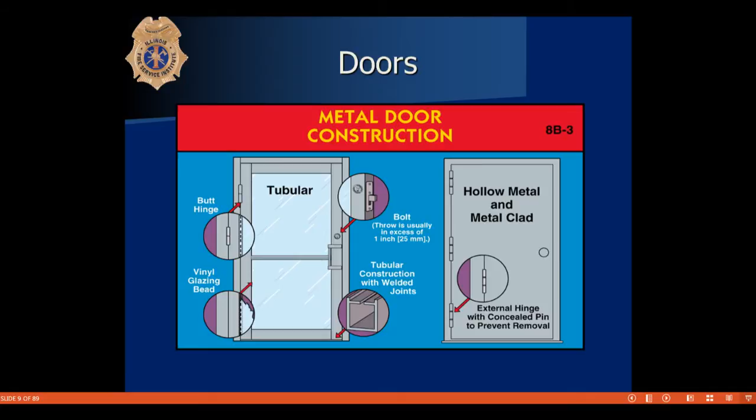Metal doors can also be hollow as well, but they'll have a ribbing system in it. Usually it won't affect you too much. As you pry on this door, you'll probably feel some flexion. As you try to work there, it won't be as stiff as some other ones.

Talking about jamb types - there's two jamb types you're going to see: rabbeted and stopped. Rabbeted is what you see right here - they've got metal frames with a metal stop, it doesn't come off. The stopped ones you see up here are like at home, where you nail a piece of trim on - you pop the trim off. Just know the difference. Why?

I pop the trim off, I put my shove knife or a little screwdriver, I'm in like nothing, no big deal. Other differences too - with a rabbeted jamb, it's one piece construction. There's just showing examples of it, and per examples, the doors right here - those are rabbeted jambs. Door swings, we already talked about.

We can tell by looking at these ones in and ones out. Would you agree with that? Does one door look harder or easier to get in just from looking at it? They're both in a masonry type structure, some type of ordinary building.

But this one's got glass. If I can't easily separate it, can I break the glass and reach in? That's not an option here. Other thing, two options we talked about - what do you see? Talking about lock assemblies.

I'm going to fly through this, guys. If I'm going too fast, stop me. I know you guys want to sit here for hours. Different type of locks, okay?

Real common you see at home, key and knob. Rim lock - you see many of these around your area anymore, these two? Those are the older homes, right? I know by us, the old ordinary homes or the brownstones on the boulevard, we see a lot of these. Old wooden homes with custom doorways.

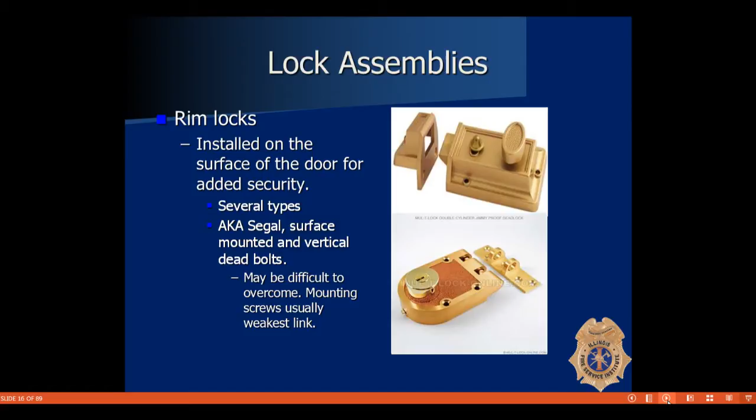Deadbolts. Newer deadbolts have changed as far as throw and construction feature and how well they work. Here's more of your common grade. That throw can be anywhere from 1 inch to 1.25 inches, so a little bit more of a throw into the jamb itself. So I'm trying to get those doors open for me - I already kind of know how far I got to separate.

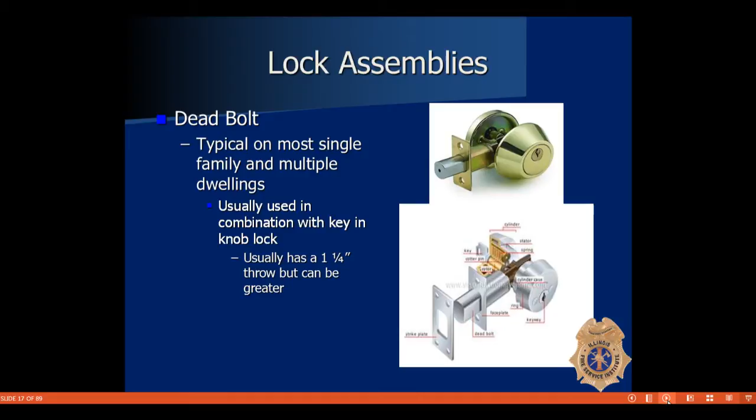If you know how your Halligan's made, you know how far your fork or adze got to be in, and as soon as you pry up or down, prying it out, you already know you've defeated it. Combination of the two together.

Here's showing the older doors with the deadbolt built in. Here's an old door - look how far that throw comes out. It's like next to nothing, okay? And look how much edge there is here of the door material. Odds are you may even get the door to split and you're in. Not a big deal if you have some of these in your areas.

You guys got anything? Jump in. I'm going like Jimmy John, speed pretty fast - so usually those mortise locks, yes sir, they're in the old panel doors.

So in other words, your outside is a 2x6, it's mortised in. Your inside's a quarter inch veneer panel. Knock out the center panel, walk right in. Walk right in. You don't want to mess those things up though.

But if it's a fire - so it's already messed up, right? Yeah, I mean, well yeah. Right, I mean it's easy to fix, to put that center panel back in. You take some, pull the trim outside off, put the door panel in. Yeah, it's easy.

This is showing a commercial lock where they have the guard so that you can't pick it. No big deal, still a larger throw with your deadbolt - that's about an inch throw.

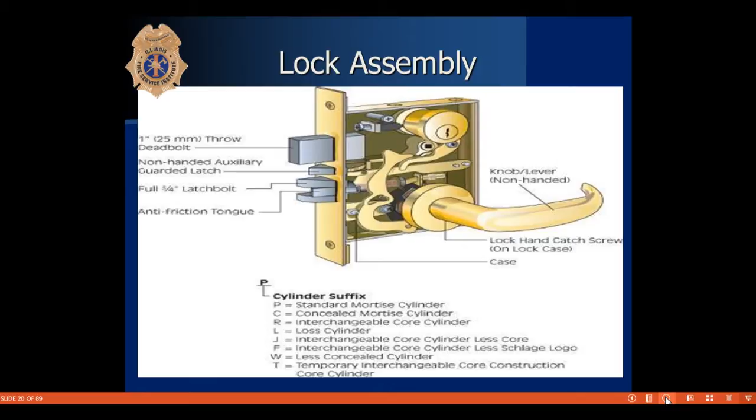Other options, panic hardware, different locks, slide bolt that goes up and down here. These are your harder doors, the ones we're really talking about for forcible entry. Most people don't have problems with residential doors.

Do you guys have any of the security storm doors here? Yeah, those are almost more of a pain to get into on some residential doors, depending on the throw and how they're done and what deadbolts there are.

With these things, what I don't like is the backside, the outside where I'm standing. Because what do I usually see? A lip, maybe a center lip, a carriage bolt, or nothing. It's the doors where I see nothing that are your problems, because I don't know what's there. They could back a forklift up against the door, a couple pallet jacks or something, who knows what. Those are the doors that could be your problems.

When I see a door like this, when I see carriage bolts or I see something, those are indicators of where I probably want to start my operation.

Padlocks, there's so many different types. How much time are you going to spend on it? There's different ways to get in. You can use the forks, spin the lock. But if there's no room to get the Halligan on, how can I spin it?

Okay, you can use the pick end, get a sledgehammer, hit the pick. Bolt cutters, saws, a lock breaker. Who knows, you may have something else on your apparatus.

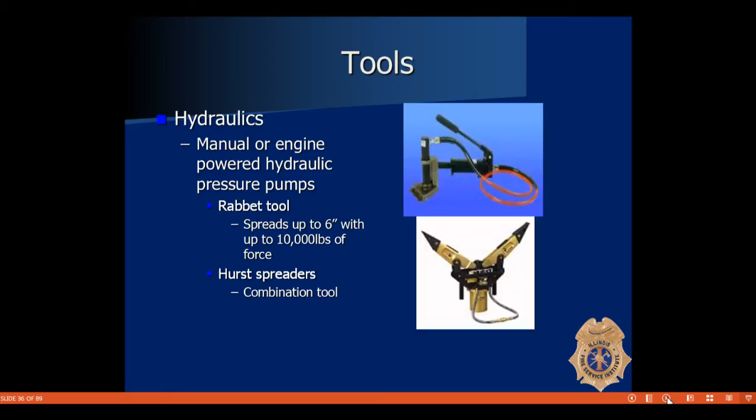K950, that's just what we have. That's a type, whether it's a Stihl, a Partner, Husqvarna, whatever.

When you're cutting metal doors, if you give it full throttle and put the saw in the door, what tends to happen? Does it walk all over? If you push it hard and fast like you think it's a wood roof, it may either bury it, bounce off, or damage something.

You can't just bury a metal blade into a metal door. Slowly feather the trigger, bring up the RPM. You might have to actually groove what you're going to cut to get that purchase point, okay? If you give it full RPM and bury it in, you could have something happen.

We had one by us where they did that, and they didn't see the fissure cracks. They buried full throttle into a hinge. The blade shattered, broke off the shroud, knocked the belt off. The guy's lucky he isn't dead. The pieces went flying fast.

I'll also say there's probably some poor maintenance on our part. We probably didn't do a thorough or good inspection of that blade itself. When we took it back and looked at the blade, you could see fissure cracks from the relief holes in the blade. Shame on us.

How about the abrasive blades? Another thing we're awesome for. We'll store these blades with the saw with the can of fuel. What do you think fuel does to these blades? Yes, it corrodes them or deteriorates them.

Damn, nice one. I gotta use that in a sentence. All right, I'm gonna use that one. All right, so something to think about.

Guess where our blades are still stored? Sorry, the chief's gonna call me for swearing. Yeah, all right, guess where our blades are still stored?

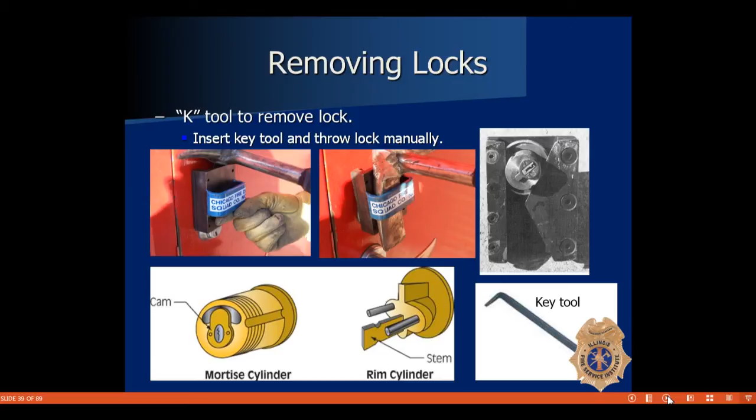Chain link fences, this sounds stupid. We have a lot of chain link fences by us, right? Backyards, people want to protect their stuff, especially in the crappier neighborhoods or lower income neighborhoods, I'll be politically correct. A lot of chain link fences.

I come up and this thing's locked and chained, I don't have much room to work. How hard is it for me to get in this gate? Pop the hinge, right? Pop the hinge up, pop the hinge down, whatever. I can even secure it. It's a home run move.

Did you see this video? I think you put it together, nicely done. That's a home run move, pop it up and down. Problem is when you get to your bigger fences and gates, you ever see them? They almost got like a U-clamp on them. That isn't going to work in those scenarios.

Other forcible entry problems, scissor gates. This is an odd one, this is actually in a roller in a track. Most normal scissor gates just go up and down.

A lot of times it's easier to break the hinge side loose. Because what usually holds this metal track into the jamb? Lag bolts, right? It's a wooden structure, it's a lag bolt. If it's an ordinary structure, there's still some type of lag or anchor in the masonry, in the mortar joint. You can take your Halligan or your sledgehammer, break the joint, and get that hinge side to come loose.

This is showing all the ways to get through locks on a scissor gate. Break it off with the pick, right? Smash through, put the forks on and spin it.

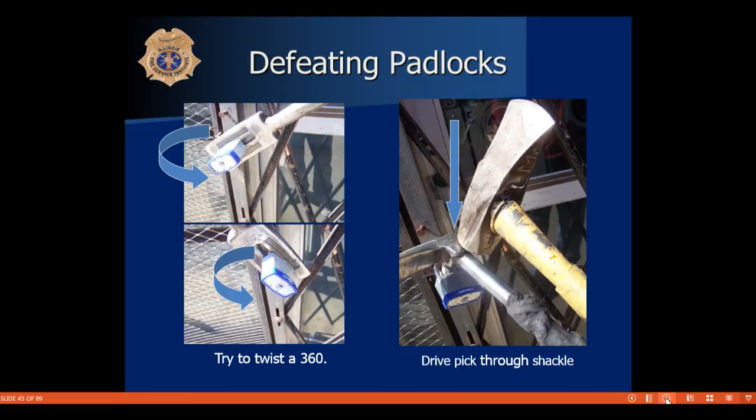On locks, they have heel and toe shackles, meaning the shackle must be cut on both sides because it won't spin out. I just cut both sides all the time, it's your home run move. Because if you only cut through real quick and go to spin it and it won't spin, it's because it has this kind of configuration. Just cut both through all the time and you're done.

That's showing the lock breaker splitting a lock. It works great if you bring it. I'm not carrying that in my tool belt with me or in my pocket, not happening.

Try to break hinges on gates, pry up - we talked about that already. And ornamental stuff, you have some of these. These are sometimes harder to get in than the door itself, because if it's in a masonry building, an ordinary constructed building, you got a deadbolt in the knob, the deadbolt's thrown in, there's not enough room for play. Okay, the other thing is, once you get it open, what do you do?

Do you take it off, completely remove it, or do you fight with it? A lot of guys try to put a wedge there, or a piece of chock, or block it open. Tends to get knocked out. From my experience, it just seems like it's knocked out. I don't know if someone's jagging me and they do it on purpose, or just as a fact the hoses come in, people hit the door, it flexes, it moves.

Your home run move is to take the door off. Problem with this is it's a solid piano hinge all the way down, right? So it's screwed in all the time. Odds are you end up taking out the brick mold with it. It's not an easy task, but if you can start working at one point, either top or bottom, start getting it to separate, you'll almost get the brick mold to separate off the jamb easier than getting this little hinge and all those screws to pull out.

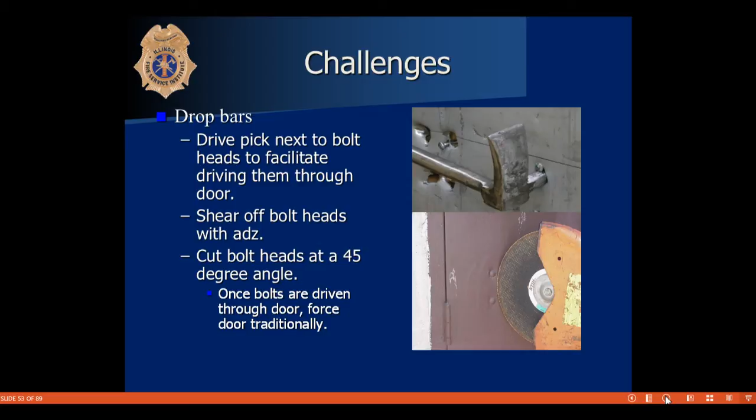Homes, other challenges - piece of plywood, piece of 2x4 against the door, some type of drop bar. Really, is this one a problem for us? I know you can't see the picture all the way - how hard is it for me to get in this door in reality? What's here - skylight, side light, center light. I can knock that out of the way.

Sometimes with these doors too, when you shock it, you may get it to bounce enough that it's not latched into a groove - that's just there by friction. They put it up, get in the right spot, friction. You may get the door to bounce enough where it loosens up enough, it starts to move.

As the door comes back in and out, it fails. This thing here, nothing. But when you go to shock the door, that bottom is not moving. You know something is there. They got a 2x4 wedged against it.

But is this a wood frame home? Yeah, if it is, what can I do here? Cut a hole, beat a hole through, whatever, remove it, okay? Or go a different way, right? There's probably another entry point into this building.

We started forcing the door. Remember that metal gate picture you saw earlier? It was a homemade metal enclosure. Who knows where they got it? Nothing for us to see.

Well, when they were still in there working, where do they think they left their empty or unused concrete bags? Right at the base of that door. Got wet, we actually had a block of concrete at the bottom of the door. And they took a sheet of plywood, literally sideways, against the stair, all the way down so it was against the door like this. We beat and beat on this door.

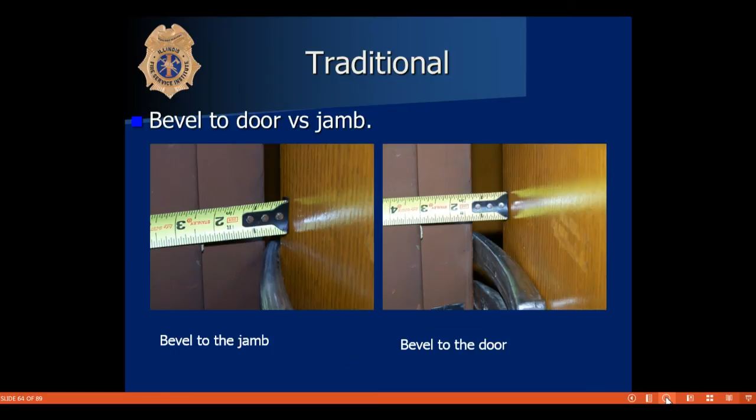Just showing the mechanical advantage between the two. We talked about purchase point, we talked about inward swing door. Tool placement - if you can, when you sound the door or use the Halligan bar, try to hold it on the shaft, not out at the end. We had one of the guys break his hand on our job. That's the real smart scientist or theory guy - for every action there's an equal opposite reaction. He did this, and all the reaction went into his hand. He broke his hand. Hold it on the shaft - at least your hands will slide on the shaft.

This will show out there. What's that, brother? You said shaft, didn't you? I heard you. Okay, you said shaft.

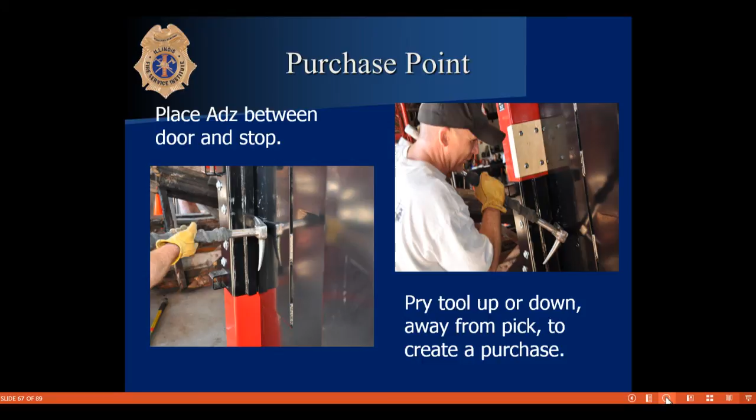We'll show this down there. Capturing progress - if you make progress on a door, it's always good to have a wedge or even an axe or some other tool there to capture your progress. There may be doors I start to force, they start to open, and if you were to remove your tool or try to get a better purchase point, you lose the gap you already created. If you get a gap, you want to keep it there. This comes in really handy.

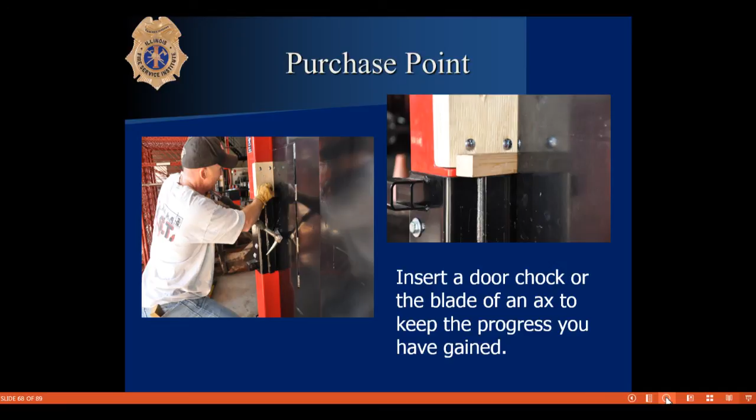Terminology: hit, stop, drive. Remember those two words I showed you earlier, the neck and the crotch? That's how we get our tool position. I'm telling you hit, I'm moving again, hit, you only hit when I tell you. When I think I'm good, I'm telling you to drive. You drive to the neck, you drive to the crotch. Done. Instead of hit, hit, hit.

And when I do say hit, and you want to remove the tool, give it a couple seconds. Because what we tend to do is we're swinging away, you start getting a little motion, rhythm going. Plan for one or two more hits just in case before you move the tool.

Choking up on the tool — we did a class, remember? The guy smashed his hand on the brick and block, messed up his finger. Did he break it? Broke his finger. His hand was here — I don't need it there, okay? That's good, but I don't need it right up against the head. If you're going to choke up on the tool, that's fine, but don't choke all the way up to the head where you're going to smash your hand if you miss.

Just the tip, my favorite game — you ever play that game? All right, for forcible entry — let's keep it clean, we're broadcasting live. Just the tip: if you have a very tight jamb and you can't get your tool in, you may want to come off on an angle and get the tip in.

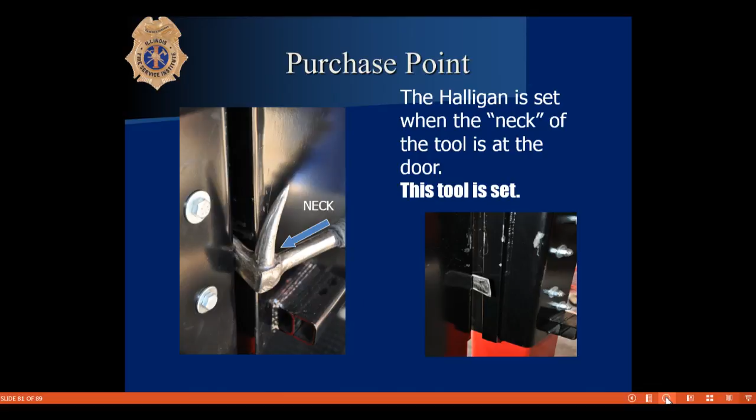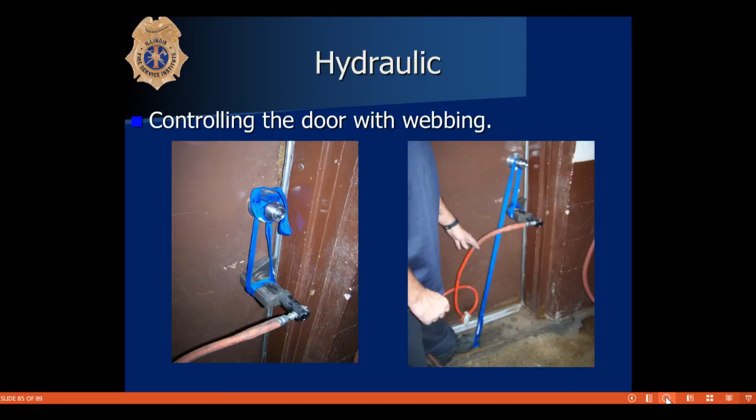So I don't know what you want your guys to wear, Chad. Gloves and helmet, if that's good — gloves, helmet's fine, okay, if we can get protection, both, if we can get both Halligan bars down there. They all have Halligan bars on their rigs, they can grab one, okay.